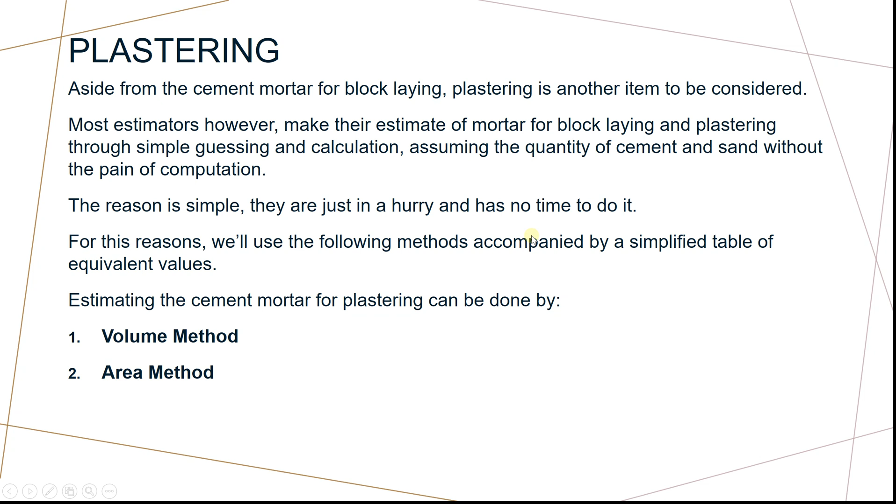So for these reasons, we'll use the following methods accompanied by a simplified table of equivalent values. Estimating the cement mortar for plaster can be done by volume and area method. So same with the laying and filling, we have the volume and area method. For plastering, ato po na siyang i-apply. So without further ado, let's start with our example. Same example as before lang gihapon. We have a wall, 3 meters by 4 meters.

So by volume method, sir, asa man napagkuha ang volume na to? So naga-assume gihapon tayo diri. Di ba? Kung sa laying, ang thickness nga i-assume nato sa mortar is 12 millimeters. For this method, let's assume ang thickness. The volume is the length times the width times the height. Now we have the total height, we have the length, but we don't know pila man ang thickness nga gamiton for the plastering.

Now, ang thickness nga we can consider di gyud fix kay kung mag-plaster ang mason, plaster muna sa gihagyod. And then of course the measurements, magbutang sila nylon for their guide. So we have assumptions diri, not really perfect estimation, but the thickness nga pwede nato i-follow is 8 millimeters, 12 millimeters, 16 millimeters, 20 mm, or 25 mm. Actually, 25 mm kay baga na, 1 inch nga plaster. So let's just assume, on average, 16 millimeter nga thickness ang atong gamiton.

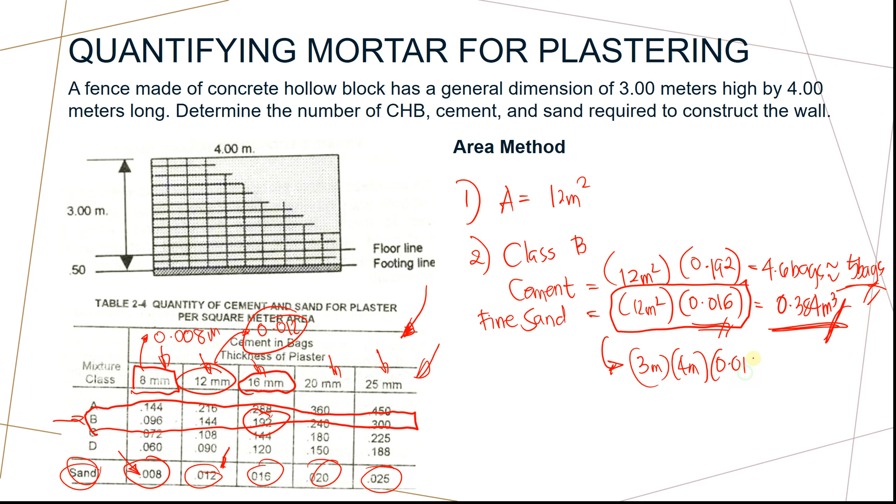So that is just equal to 0.384 cubic meter. So whatever thickness of plaster you consider, that is also the factor you consider for the fine sand. Take note, fine sand is in cubic meters. So actually for fine sand, it's like a volume method, right? You have 3 meters times 4 meters times the thickness, 0.016 meters, and then you have the fine sand.

Okay, if you remember, for Class B fine sand, the factor is just 1. So what you got here is 0.384. That is just the area times the thickness. That's the factor, so you can easily remember it for plastering in this area method. That's it for the fine sand, the volume of the fine sand for plastering.

Now take note that this is for one side only, just one face of the wall. Now, what if two sides of the wall are considered? What do you mean by one side or two sides? A wall has two sides. What we solved is only for this side. How about the other side? Okay, if it has two sides, we multiply this by 2.

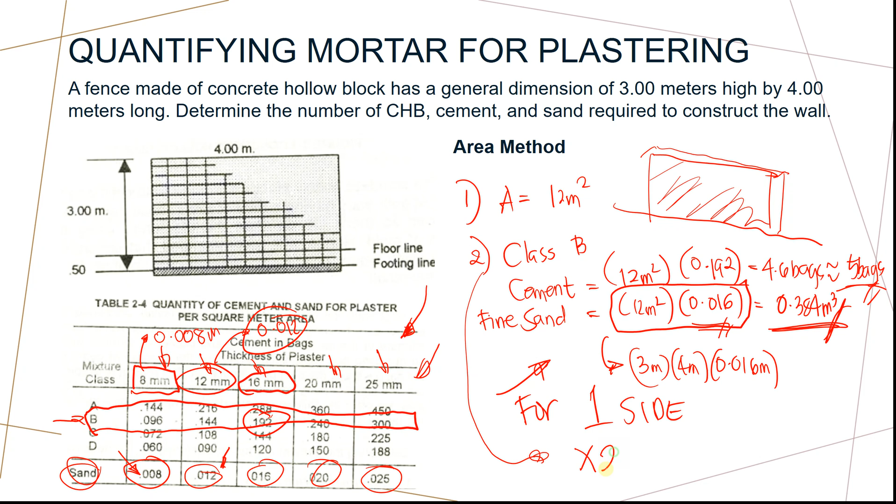So for the cement bags, we need 5 bags. And for the fine sand, times 2, we need that total number of cubic meters of mortar for plastering. So back to back, both sides of the wall are plastered.

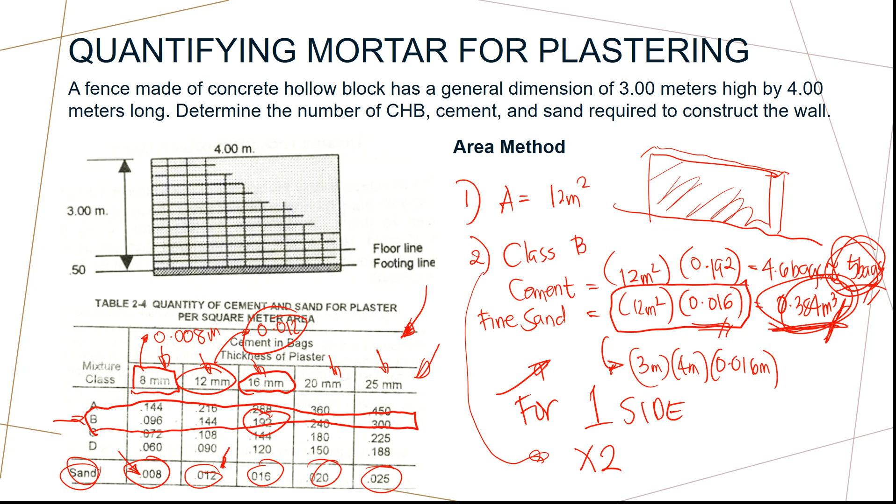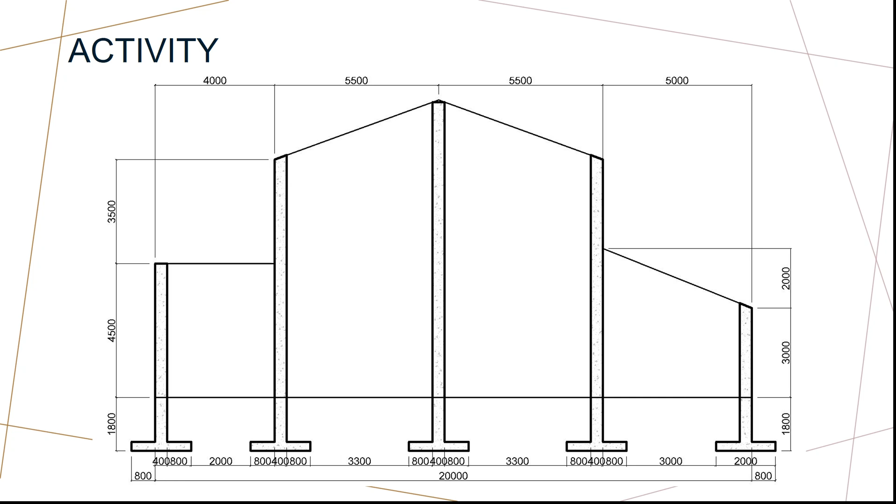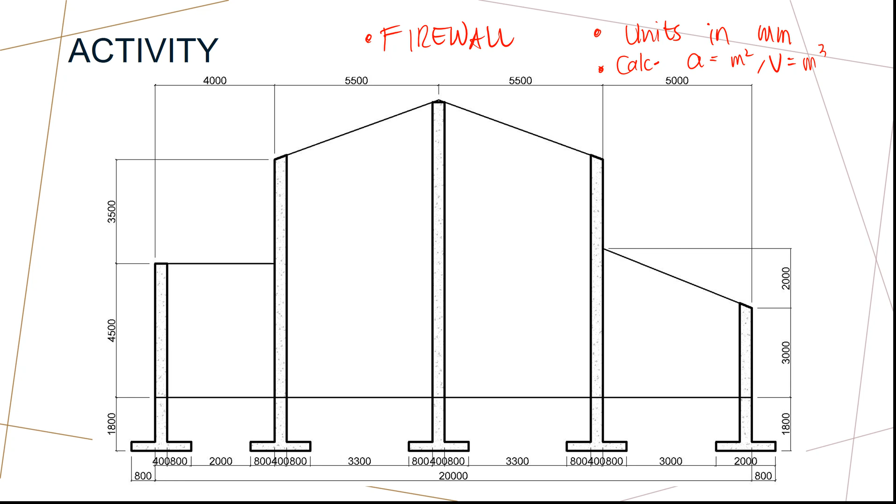So this is your activity. You may screenshot this specific part of the building. Now, this is a firewall. And take note that the units shown are in millimeters. But in the calculations, the area should be in square meters, the volume in cubic meters, etc. So in this specific firewall, you have columns shown. There is also a foundation. And we have the walls.

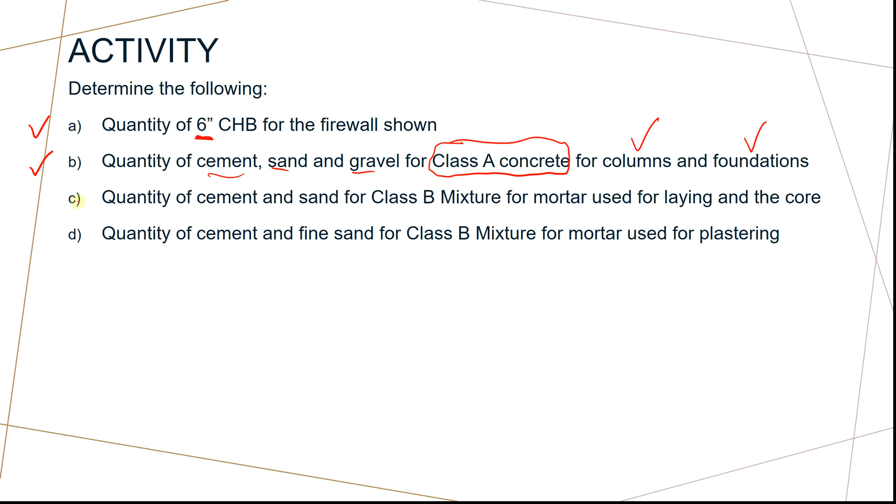So what are we looking for, what are the requirements? Okay, this is what you need to determine. The number of 6-inch CHB. Take note, 6-inch CHB is used here. How many CHB will be used. And then the quantity of cement, sand, and gravel for Class A concrete for the columns and the foundation, as discussed in the previous lecture on concrete works.

The quantity of cement and sand for Class B mortar used for laying and for filling. And the quantity of cement and fine sand for Class B mortar mixture used for plastering.

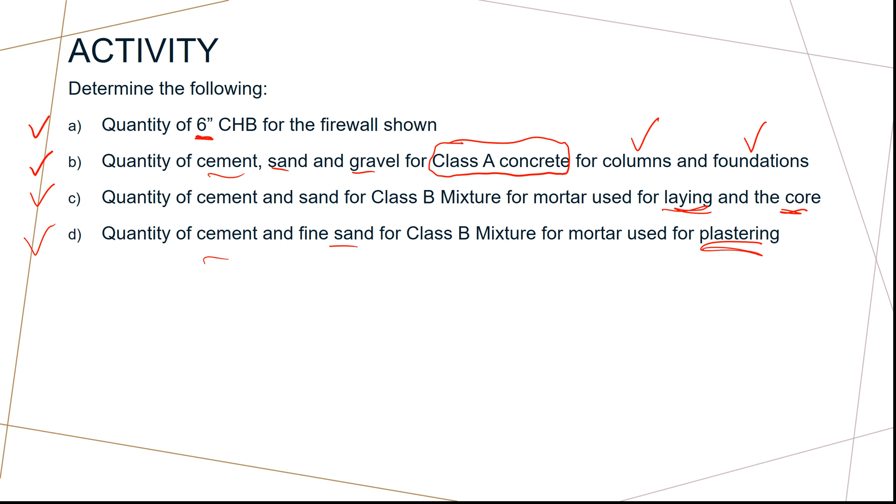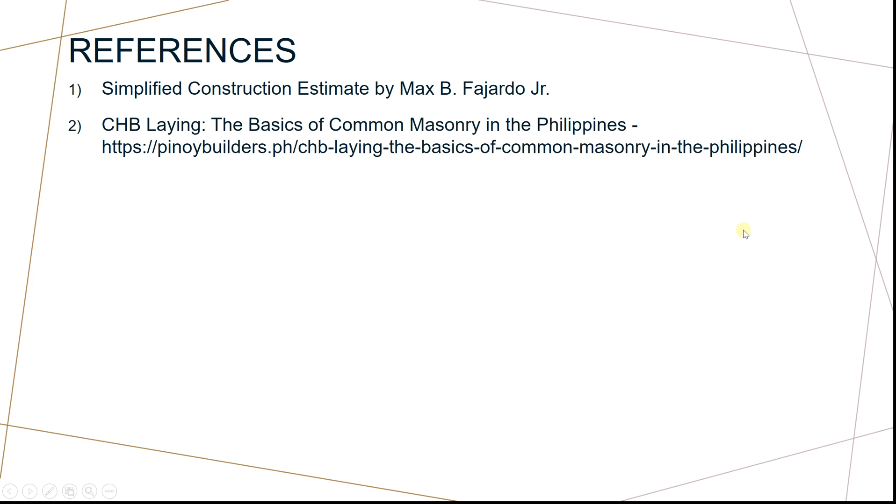And these are the references for this discussion. And that would be all for this discussion on masonry works.